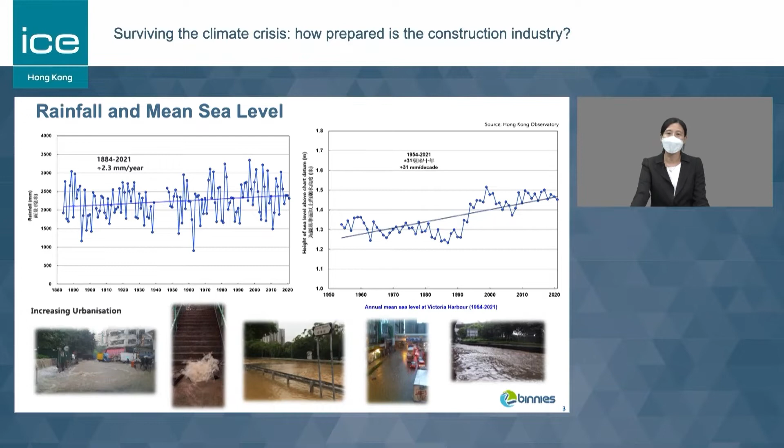Incorporating continuous urbanization, we can tell there's increasing flood risk in the city, as shown in some of the photos and flooding records that we have obtained.

So how are we doing in Hong Kong? What have we been implementing to resist, provide additional function, or cope with climate change or the increasing rainstorm and tidal level?

In terms of other drainage improvement works, we also have the stormwater storage scheme. Its purpose is to attenuate the peak flow during severe storm events. Water will be stored in the storage tank, wait for the rain to subside, and then be pumped back or gravity discharged back to the downstream drainage system. In general, the stormwater storage scheme is also capable of retaining or attenuating about 30% of flow in the catchment.

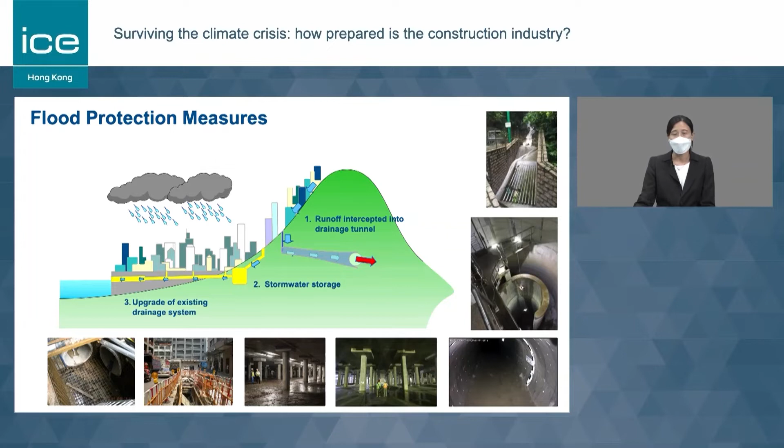Some of the examples that we have been implementing in Hong Kong are drainage tunnels. The first drainage tunnel in Hong Kong is the Kai Tak transfer scheme. Subsequently, we have the Hong Kong West drainage tunnel, Lai Chi Kok drainage tunnel, and Tsuen Wan drainage tunnel.

A lot of design considerations need to be taken into account when designing a drainage tunnel, such as the location of the intake. We want to locate the intake of the drainage tunnel to make sure we are maximizing the runoff interception in the catchment, as well as increasing the amount of interception so it is able to intercept the maximum amount of rainfall and provide the best benefits to the public.

Also, the intake design needs to take into account the high flow velocity getting into the intake, to make sure there's enough energy dissipation to get into the tunnel. As engineers, we also need to take into account the geological conditions of the tunnel, making sure it is constructible.

In terms of environmental considerations, having the tunnel, we have to make sure there's ecological flow, not intercepting 100% of the runoff from the catchment, but leaving a small amount of ecological flow to be conveyed downstream. So as hydraulic engineers, we have to take into account all these considerations when implementing drainage tunnels.

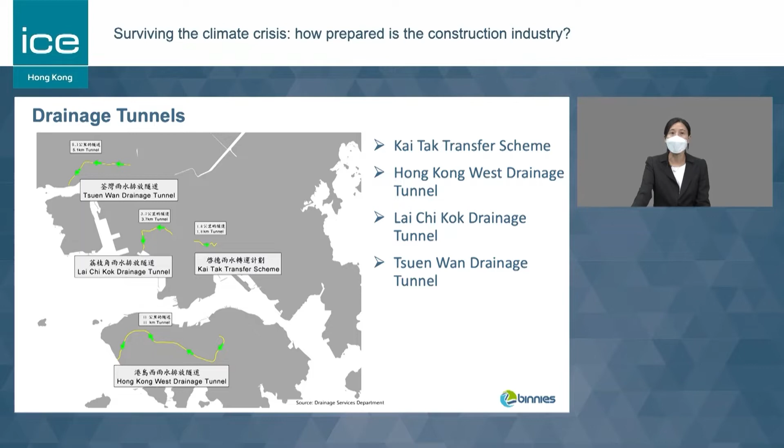Next is the stormwater storage scheme. The first stormwater storage scheme in Hong Kong is the Tai Hang Tung stormwater storage scheme. The second is the Happy Valley stormwater storage scheme, followed by the Sheung Wan stormwater storage scheme and the Shenzhen River flood retardation pond. These are only some examples, and there are many others implemented in Hong Kong.

The Sheung Wan stormwater storage scheme is slightly different in that it provides storage as well as a pumping station, because it is situated next to the ocean, so a pumping station is required to discharge the stored water into Victoria Harbour.

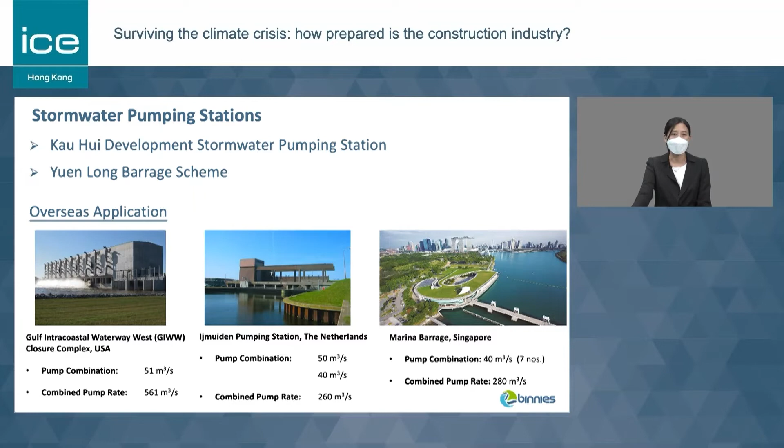To fulfill the United Nations Sustainable Development Goals as well as our Hong Kong's Climate Action Plan 2050, we have to prepare, reorganize our mentalities, and enhance the absorption capacity of our city. So how have we been doing in Hong Kong in terms of preparing, reorganizing, and absorbing the surface runoff?

One thing that we are recommending to do is have a total water management approach in terms of water resources. Reservoirs actually provide a huge amount of storage in Hong Kong.

In Hong Kong, we also have the water tunnel scheme. One water tunnel scheme I would like to introduce is the Plover Cove tunnel water tunnel scheme. The difference between this tunnel and other drainage tunnels is that it is in use during both dry season and wet season, providing a multi-function use over the year.

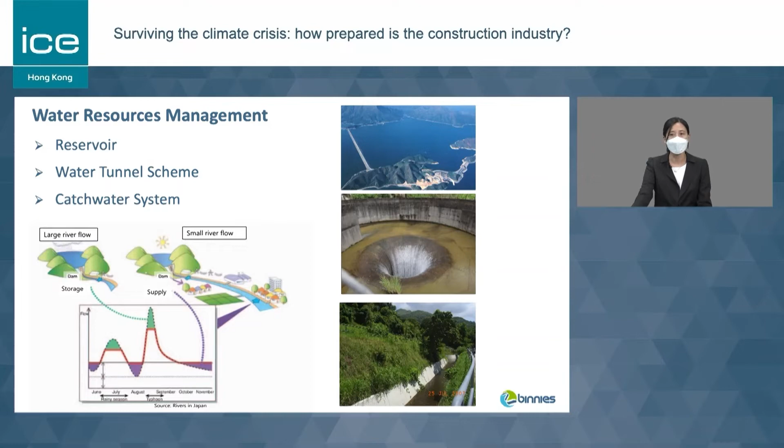I also mentioned about absorption. Recently, we have a lot of blue-green infrastructure being adopted in Hong Kong. The concept of blue-green infrastructure is to increase infiltration and replenish the groundwater table, recharge the aquifer, in order to reduce the surface runoff.

As the infrastructure investment, another idea is the porous pavement. It also increases the amount of infiltration going into the underground.

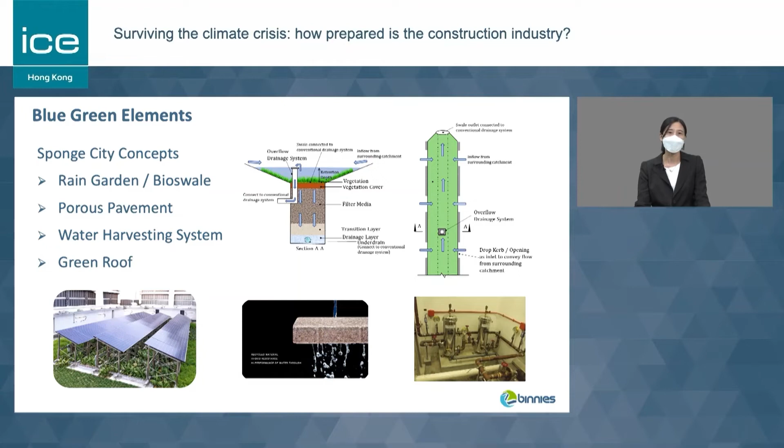In addition to the bioswale or green infrastructure, these days when designing river works, we are also developing nature-based solutions. In the past, when developing river training works, the existing alignment of the river would often have a meandering shape, and what we would do in the past was just throw concrete into it and make it a straight channel.

But taking a nature-based solution approach, first of all, we have to take into account the existence of the floodplain, as well as any existing wetland that provides storage to the adjacent areas. So instead of making a straight alignment, these days we take into account these features in the existing river to design the improved river channel.

So in this case, this kind of design will be able to maintain biodiversity, as well as having the meandering channel. The flow velocity will be a lot slower to enhance the ecosystem by enhancing the habitat in the drainage channel.

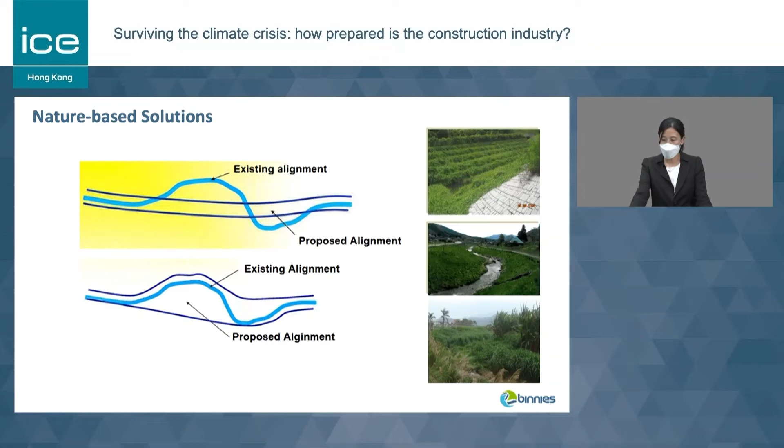So what other benefits are achieved after having this vegetation or maintaining this floodplain? Well, it will be able to mitigate the production of greenhouse emissions, as well as mitigate the urban heat island effect and reduce the effects of global warming.

So some of the constraints that we have to consider in the urban area when implementing this kind of green infrastructure is it's quite difficult to implement it in urban areas. Say, imagine if you want to implement a bioswale or this kind of river design in Mongkok or Causeway Bay, there's a lot of site constraints to implement those. So the opportunities need to be identified, as well as the space adequacy we need to provide to adopt this kind of design.

So how have we been doing? Identifying this opportunity comes when we are developing the new development areas, and also the recent Northern Metropolis development. So in terms of the application in new development areas, for example, I am using the Yuen Long South development as one of the examples in this presentation.

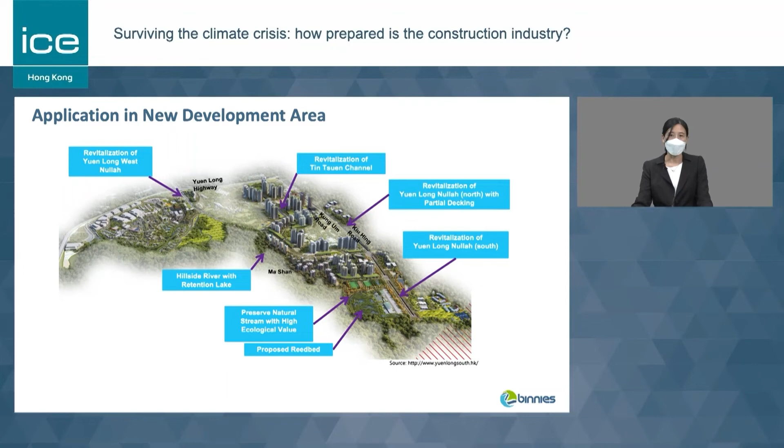Yuen Long South adopts a smart, green, resilient concept in developing this new area. Key components of this development include the revitalization of the existing concrete channel to a green-lined river channel, incorporating the hillside river with retention tank for storage and retention lake for storage. The rivers with high ecological value we will be preserving, and we are adopting the reed bed design for further natural polishing of the sewage effluent.

So some of the river revitalization design is presented here. When we are doing river revitalization, a lot of the design consideration is the structural considerations and the adjacent features, whether there's a road, or the land requirement. So when there's limitation, we still try to maximize the greening in the channel. And at the same time, we are taking into account the horizontal or vertical connectivity, whether we want to maximize the connectivity vertically, connecting stormwater with the groundwater.

So in terms of this river revitalization, it will provide a vibrant environment to the community. The design is aiming to provide a better leisure environment to the community, as well as maintaining or enhancing the biodiversity and enhancing the ecological habitat.

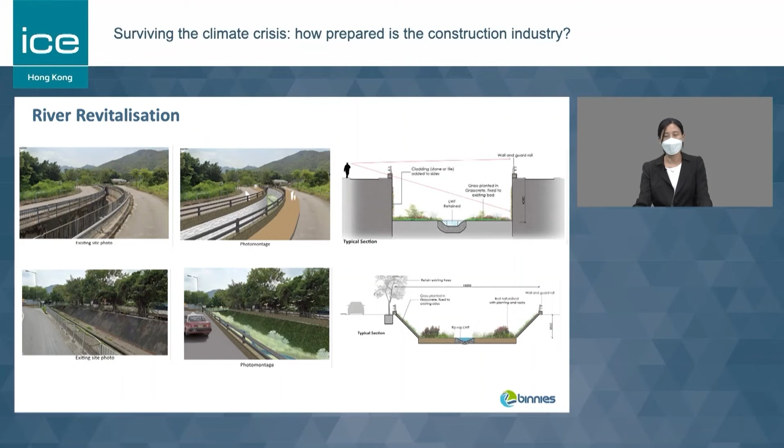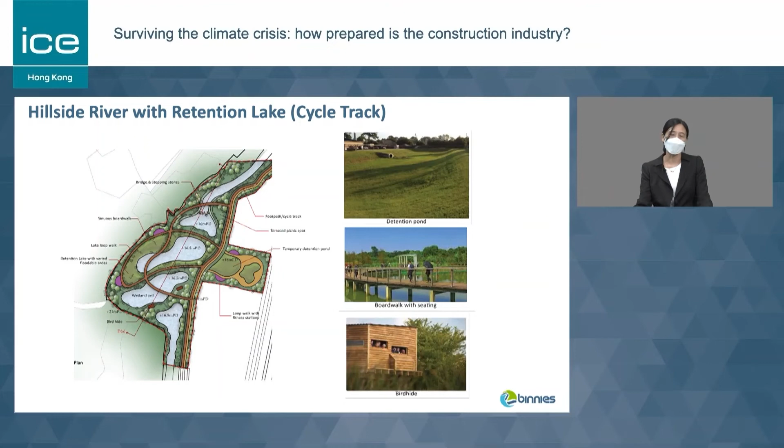So another feature that we have designed in Yuen Long South is the hillside river with the retention lake. It also includes a cycle track so that the residents or community can enjoy the natural environment. So in this design, when there's a storm event, it provides a storage area such that the size of the adjacent or downstream drainage system can be reduced. And it also enhances the natural environment in the area. So during the wet season, it will serve as a detention pond, and in the meantime, it also provides recreational facilities to the public.

Another feature, next to the future sewage treatment works, the Yuen Long South Effluent Polishing Plant, we are proposing the reed bed with storage capability such that it is providing further natural purification to the community.

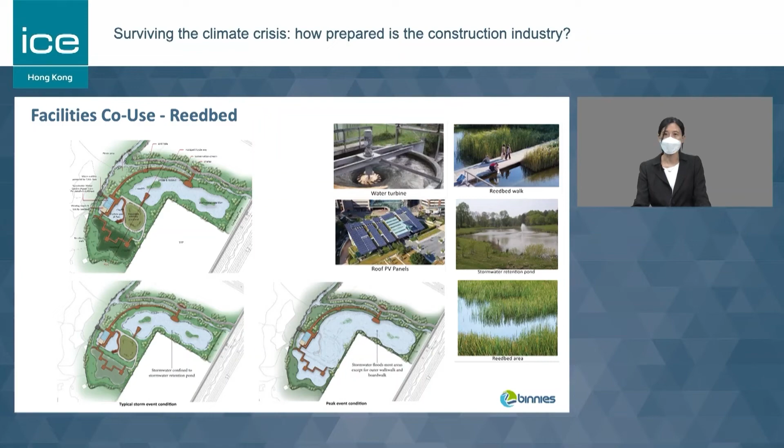These days, a lot of R&D studies are also developing AI or future forecasting systems to enhance the forecasting system. We are hoping to collect big data from previous historical storm events and use those data to train the hydraulic model, such that an accurate flood forecasting and warning system can be published to the public, so they have sufficient time to respond and react before the flood comes.

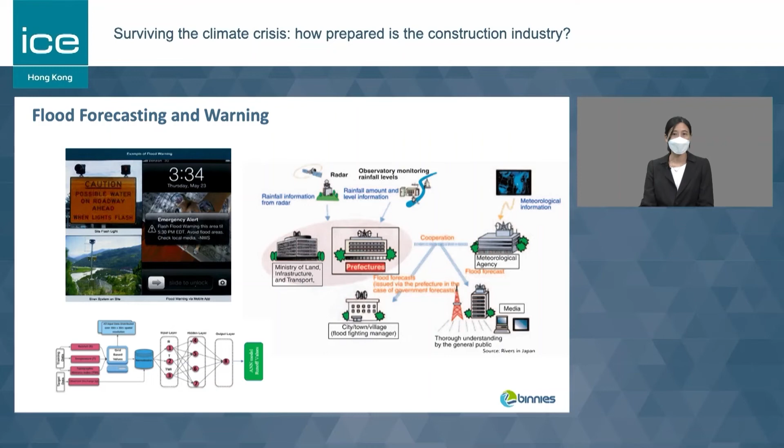In Hong Kong, we are also providing a lot of warning, and public education is very important, such that during a non-sunny day, people will be aware and be careful about the potential flooding, and to reduce the damage that may potentially be caused in the high storm surge locations or the high flood risk areas. Just like when you see the weather forecast, you should be avoiding this kind of area to avoid damage and casualties.

So in terms of having this public information disseminated, I think we in Hong Kong will be working on this to make sure we have an accurate forecast and to disseminate the information to the public. So last but not least, we are looking into having this innovative idea incorporated into our flood protection measures, so that we will be teaming up with a lot of engineers in other disciplines. But most important of all, we are also teaming up with the public to raise their awareness such that they can take care of themselves during severe rainstorm events and secure their safety.

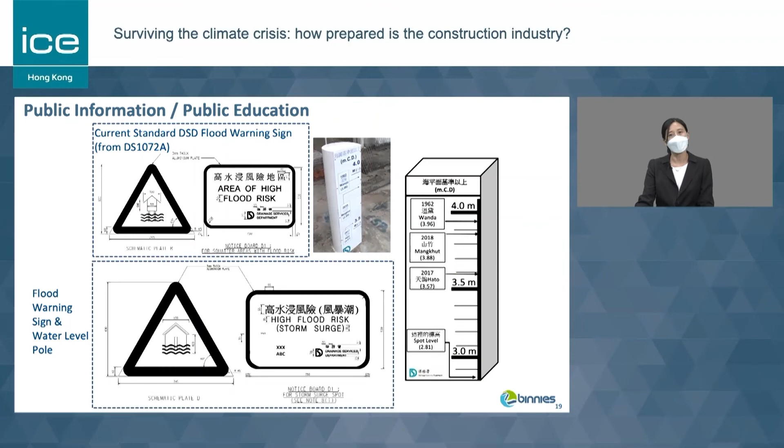And the most important part is we are collaborating with nature. We want to develop nature-based solutions such that we can adapt to climate change. And this is the end of my presentation. Thank you.

Thank you, Sylvia. It's a very informative talk. I have a question for you. How prepared do you think Hong Kong is for the worsening climate change to come? I mean, what we are preparing for is the present. How prepared are we for the future?

Well, as climate change is quite uncertain, it's a bit difficult to say how well we are preparing. But all engineers in Hong Kong are getting prepared and doing our best to secure the safety of the public. A lot of things should be kept in view, but at the same time, we are also making a lot of preparations for upgrading the drainage system or developing nature-based solutions to minimize the impact in case of a climate change emergency.

So I believe that we do have the sense that we need to pay particular attention to this issue, with climate change resilience, or with a mentality to keep this idea in mind. I think everyone in Hong Kong has been prepared to adapt to climate change.